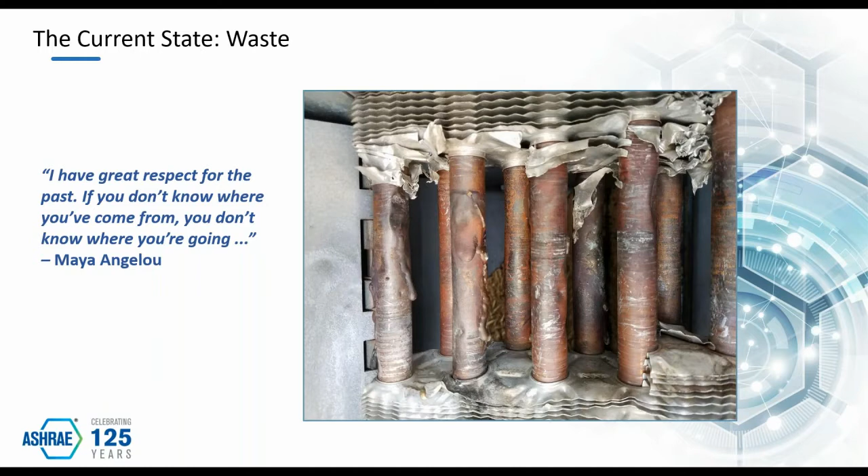Why are we still burdened in this industry with marginal yields? Well, first, our current workflows are ripe with waste. It is estimated that in the US alone, $177 billion is lost annually on non-productive labor activities: looking for information, engaging in conflict resolution, dealing with mistakes and performing rework. These all impact the bottom line. $31 billion of this loss is directly associated with poor data and communication. Poor in this context is inaccurate, inaccessible, and incompatible.

Look at this from a comparison of the manufacturing sector with the construction world. Waste is high, value is low. Waste in the solution delivery context has a direct impact on building performance. When optimization is not achieved, performance waste is embodied in the shortcomings.

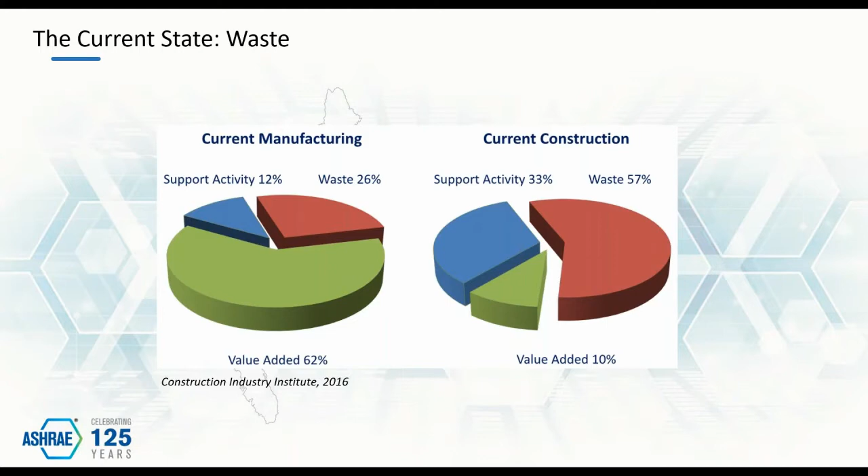Second, E&C is a flat ecosystem. Data reflects that we are not very productive. Sadly, our annual productivity growth has only increased 1% over the past 2 decades. Stagnation is costly. Look at these trends comparing construction to the total economy and manufacturing. We are relatively flat. Look at the orange line.

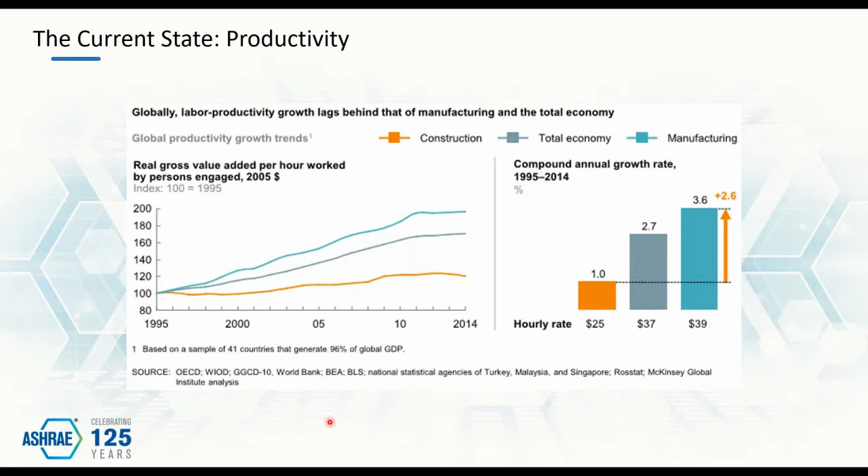What if I presented this in a global perspective? McKinsey shows us that the U.S. construction market is a declining leader. Look at this from another perspective. Stagnation also reveals a paucity of integrated high-performance solutions that are more sustainable, use less energy, and optimize holistic building environmental footprint. We are behind.

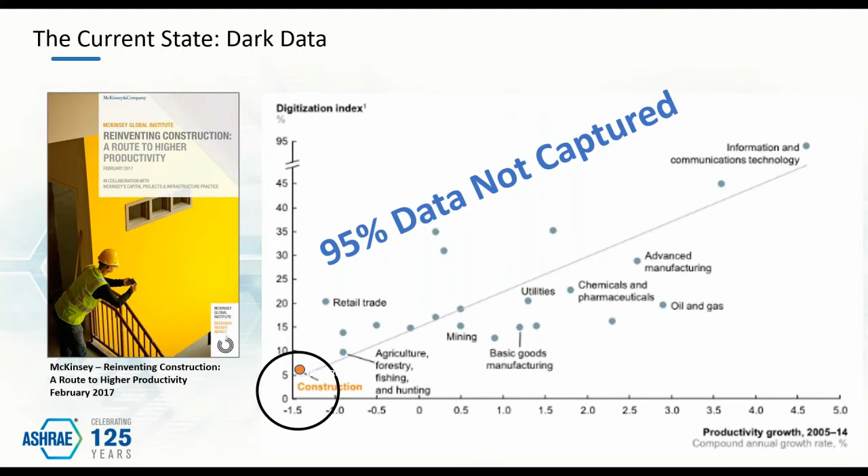Third, our ecosystem remains one of the least digitized sectors in the world. Look at us, low and left. This is not a good place to be. To compound this shortcoming, FMI suggests that up to 95% of data that is collected goes unused. We allow knowledge to go dark. Dark knowledge becomes lost knowledge. This lost knowledge is vital to building resource management.

Fourth, our logistics are poor. Our projects are late and they're over budget. Finally, it is fair to say that we remain shackled to the analog age. Over many decades, we have perfected the dance of the silos. Risk and liability keep us from optimizing the whole. We protect our borders from the impact of others.

We have so many touch points. We manually collect, review, and transfer data. We continuously recreate knowledge. We rarely consider cost and schedule as inputs to design. Rather, we delete scope when bids are over budget. We rely on paper for everything. Paper consumes time. We focus on the silos of prescriptive normative minimum. The whole is not optimized.

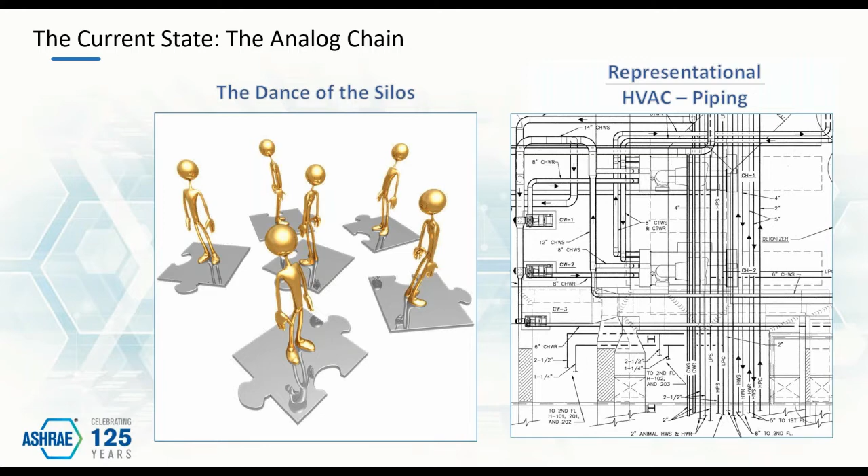We attempt to build something, looking across static drawings of, let's face it, variable quality from multiple players. Work results get executed by who arrives first in the space. This is the world we know. We excel at fragmentation and the weeds of waste. But let's look at our current state from another perspective. And we seem to lose track of this.

What do owners want their harvest to be? They want us, all of us in this industry, to do the following: resolve issues virtually before they become physical, reduce the level of unknowns and eliminate the need for RFIs, provide better cost schedule certainty, improve closeout, deliver a complete knowledge base, develop holistic, optimized solutions that minimize environmental footprint, and deliver something that works.

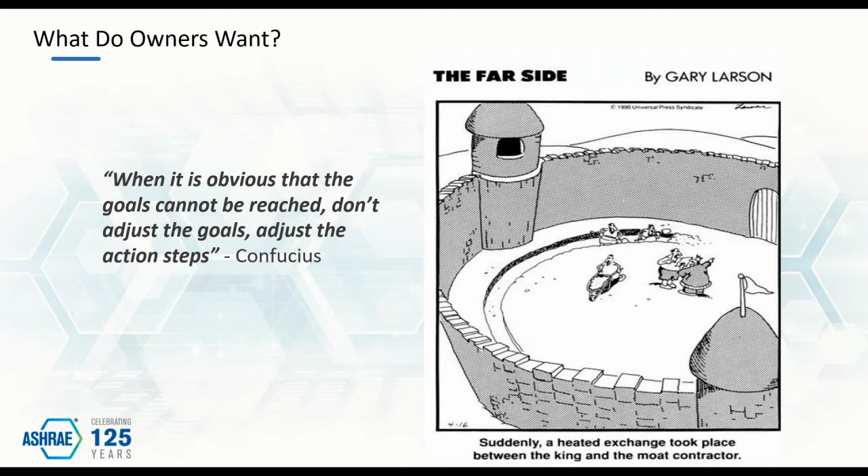I dare say these are not onerous expectations. Somehow, our industry has managed to lose track of the harvest. How do we change course and alter these conditions of satisfaction? Well, I'm going to tell you, but before we outline the path, let's reflect on our processes.

The conventional delivery process, CDP, is characterized as a linear process of sequential response by all project team members. The project builds on previous decisions, regardless of whether or not optimal foundation work is established for the next layer of development. In effect, CDP is similar to making sausage. We just cram it down the system.

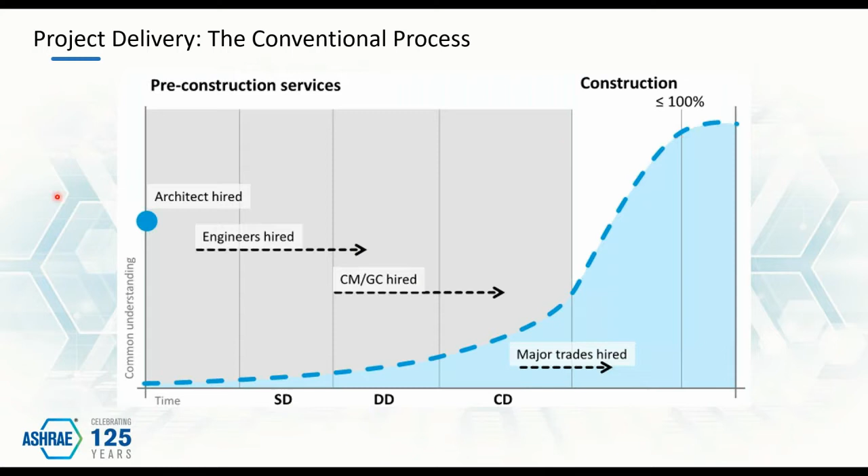Look at this sequential linearity from a common understanding perspective: the timing of when people get involved and then the understanding of what it was you were trying to do. It's a horrible system. AIA does a wonderful job of capturing this in a sequencing of what, how, who, and then realize. But look at the staggered nature of the engagement of the team players.

Conventional CDP is all about command and control, transactions, and start to finish thought. Individual risk and liability concerns foster a work environment that does not empower project participants to collaborate. Instead of optimizing interdependencies, we protect against interdependent shortcomings. The sequential nature of CDP precludes collaborative input and hampers optimized development of the project.

There's a better way. Like CDP, the integrated delivery process, or IDP, delivers a semi-linear phase progression. Instead of building on sequential response decisions, though, workflow is altered to include iterative loops. Previous decisions are challenged in an effort to find optimized solutions that fit within the project guidance. Instead of making sausage in isolation, we seek continuous improvement by making pretzels.

Look at how common understanding changes when all stakeholders are engaged in inception. We understand what it is we're trying to accomplish, and we're doing it early on.

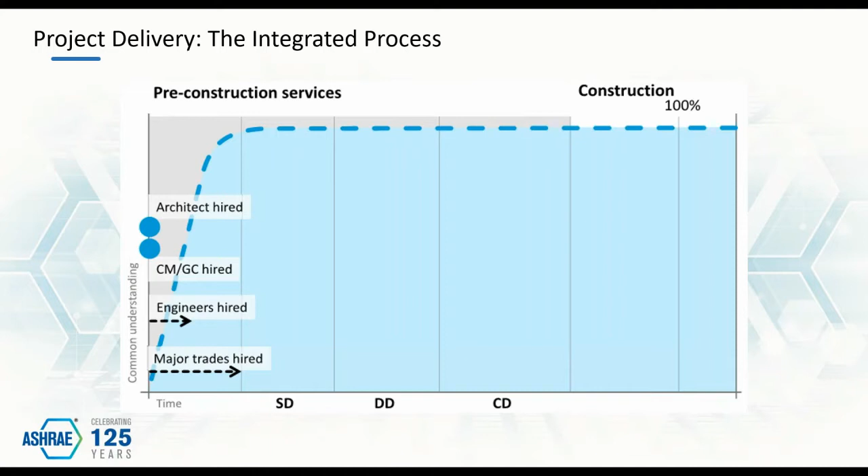AIA has another way of capturing that. Note specifically what we showed before with the what, how, who, realize progression now morphs to what, who, how, realize. This is a vital element of IPD implementation of the collaborative team concept, with more inclusive roles and altered participation timing. Command and control yields to relational.

Transactional is replaced by collaboration, and start to finish mindset evolves to lean and the pursuit of value. Collaboration fosters solution delivery of integrated systems that, in aggregate, form a holistic building. Perspective shifts from isolated stakeholder interests to one of optimized interdependencies and group accountability.

CDP can promote a less than desirable dynamic referred to as delivery in isolation. Isolation refers to the potential for work to proceed without collaborative knowledge of what the other stakeholders are doing. This phenomenon is demonstrated by our adherence to linear hierarchy role management. We see our first example of linearity in the basic tripartite relationship between the owner, contractor, and designer.

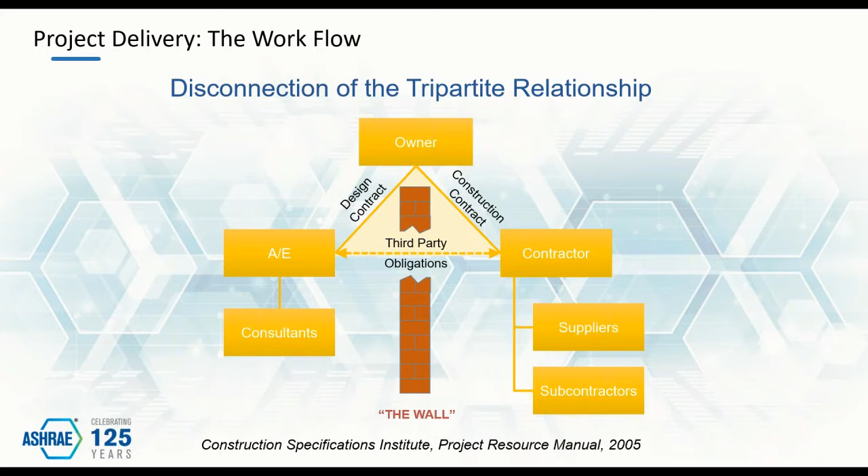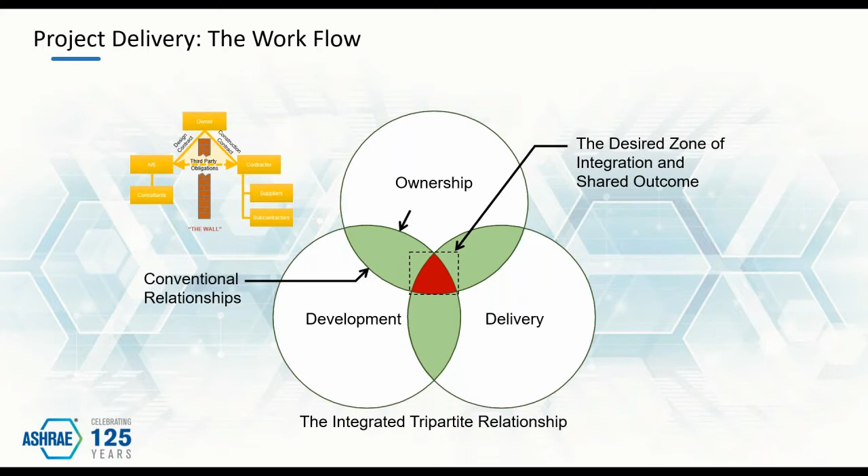A contractual disconnect exists between the design and construction paths when employing a design bid build model. In effect, we create a collaborative development wall from the outset between design and construction interests. IPD shifts the structure and mindset of the conventional tripartite relationship pyramid to one of shared outcome. Conceptually, the overlap of the tripartite interests represents the zone of integration. Silos and hierarchy yield to collaborative intelligence.

So that's foundation work. Let's really talk about the future of work. Improving our harvest begins with altering our view on the execution of work itself. For many of us, work is a place to go perform tasks. We go to work, we work on a project, finish work for the day, and we go home. Our path to fragmentation began many decades ago. Let's face it, the assembly line siloed work, and the progression through industries 2.0 and 3.0 refined work tasks. Over time, we have systematically built our own silos.

What is the work that really needs to be done? What if work itself was redefined? What if we shifted from task to higher value activities? Prepare yourself. A new vision of human engagement awaits. Work, workforce, and workplace. Imagine a world where we break down work silos and become one integrated force. Collaboration will engage all stakeholders at inception to find value. Digital intelligence will amplify human intelligence.

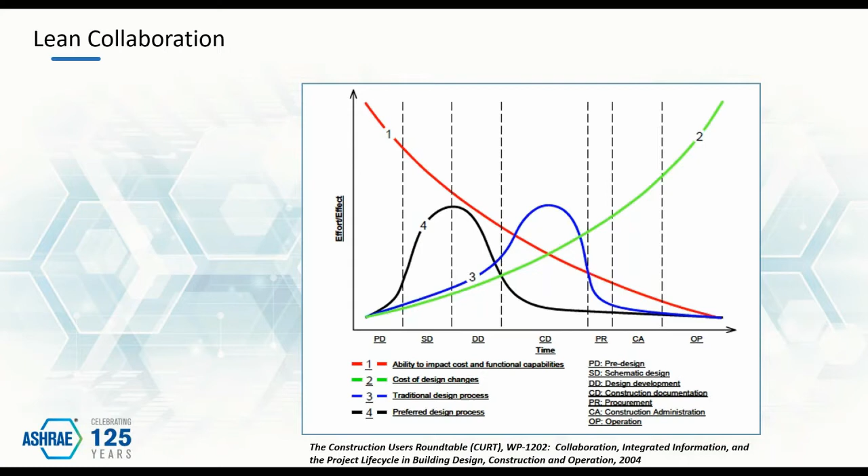Step 1, and you may recognize the famous MacLeamy curves. Step 1 of our transformation requires proper preparation via lean collaboration. Preparation must always keep value discovery in focus. Beneficial impact is best realized when captured early. Effort that occurs later in development has minimal opportunity to impact value, and changes become very expensive.

Lean processes create better customer experiences. Our ecosystem needs to adopt a lesson from manufacturing. That which does not add value is waste. It's pure waste. But how do we uncover value? 6 principles of lean illuminate our path. Respect for people is the core fundamental.

We must evolve to value stakeholders and their knowledge, solve the issues and stop blaming the participants, and honor our commitments to the team. We must look beyond the borders to optimize the whole. We really have to define what customer value means. What do they want? How do they want it? And what are they willing to pay to get it?

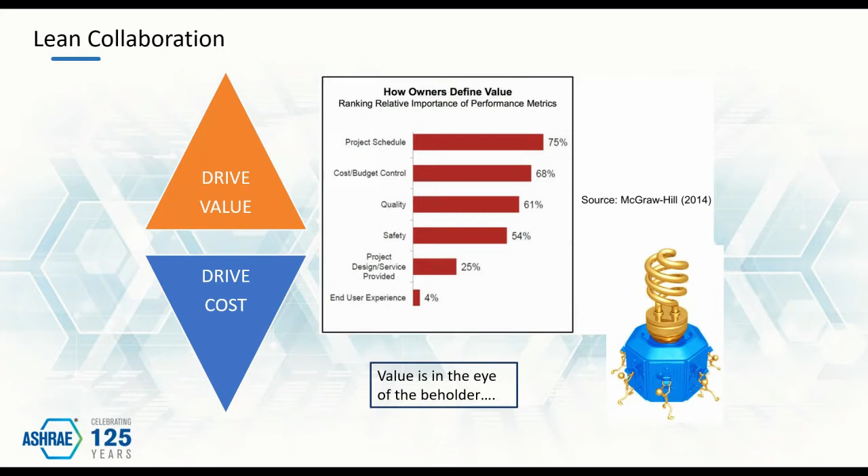We must map the value stream to identify and remove waste: wasteful practices, wasteful solutions, wasteful operations. We must map the value stream. Execution of Lean IPD requires new perspective for all of us. Consider, there's only one narrative. Risk and reward are shared, and decisions are value-based. In all phases, nothing is done until it should be done. And yes, design is no exception to this rule.

I will never forget my first visit to what we call the big room. And yes, that's me with a little big belly right there.

My comfort zone was attacked. I'm an engineer. I like order. I like things in order. My comfort zone was attacked. My understanding of order was threatened. I was in a new world. Project success wasn't prescripted. Humans reached across borders to define what the harvest should be.

We became the operative word. How are we going to deliver this as a team? Flow was no longer associated with fluid transport. How could this be? I'm an engineer. There's got to be a pump, some water's got to move. Flow had a far more important role to play. And just for good measure, flow didn't start at the headwaters and move outbound. Oh no, not that simple.

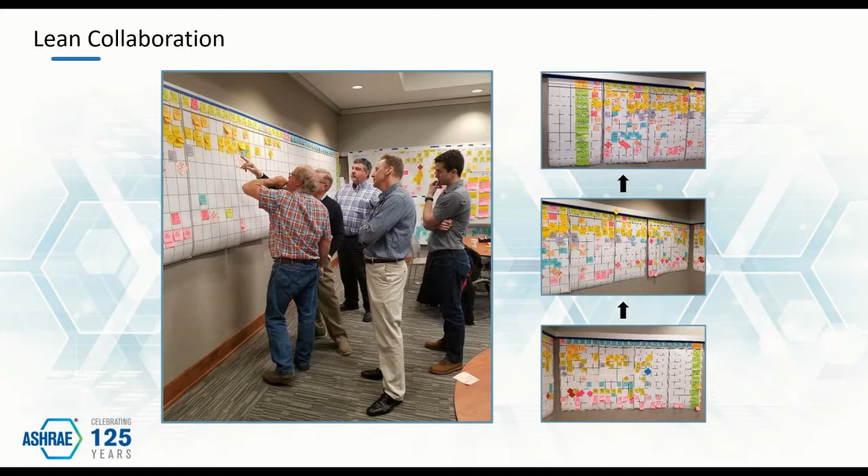Flow started at the vision of a built solution and backed up to understand the path that needed to be traveled, a path that revealed how the project would be delivered, what the order of events needed to be, and who owned the commitments along that path. And finally, we must demonstrate continuous improvement along this path. That is lean collaboration.

So proper preparation will reveal all aspects of planting the correct crop. How we maintain that crop defines how bountiful our harvest will be. Step 2 requires embracing digital technology. Transformation, though, is not simply associated with adopting new technology, buying the latest software. Knowledge needs to be captured and linked. It's all about knowledge. So let's explore critical aspects of managing this process and what opportunities the digital landscape affords us.

Digital technology is creating vast amounts of data. We are literally swimming in data. We must figure out a way to connect all of this knowledge. The evolution of the common data environment, CDE, is warranted to manage information. A single source, single truth, lighthouse. The CDE platform sets the table for all portable project knowledge. Connected knowledge affords interconnection, which paves the way for grid interactive buildings and resilient communities.

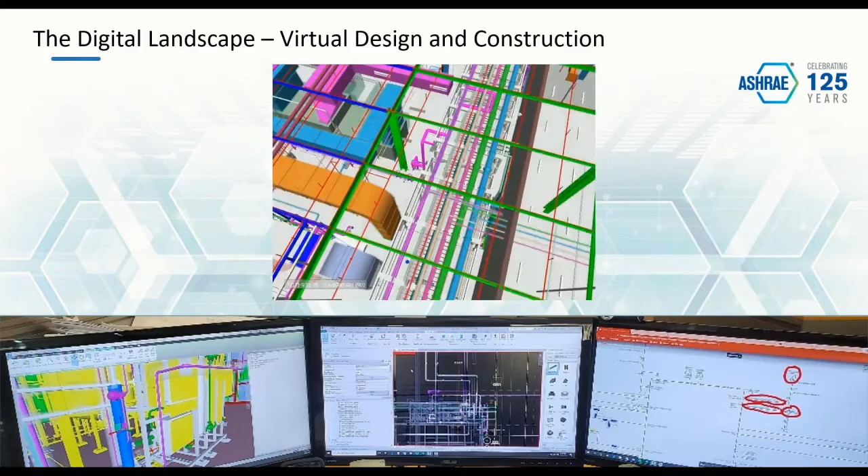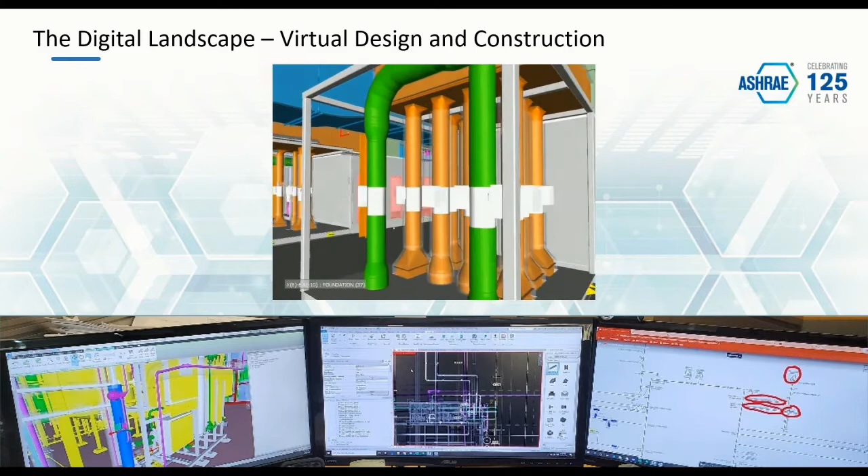Virtual design and construction, or VDC for short, is a process that moves us from static drawings to 7D BIM models. We are making the transition from static geometry to dynamic information. Remember when we shifted from paper to CAD? Well, the shift from CAD to digital models is going to be just as disruptive. But intelligent objects contain knowledge. Changing an object anywhere becomes an integrated change everywhere.

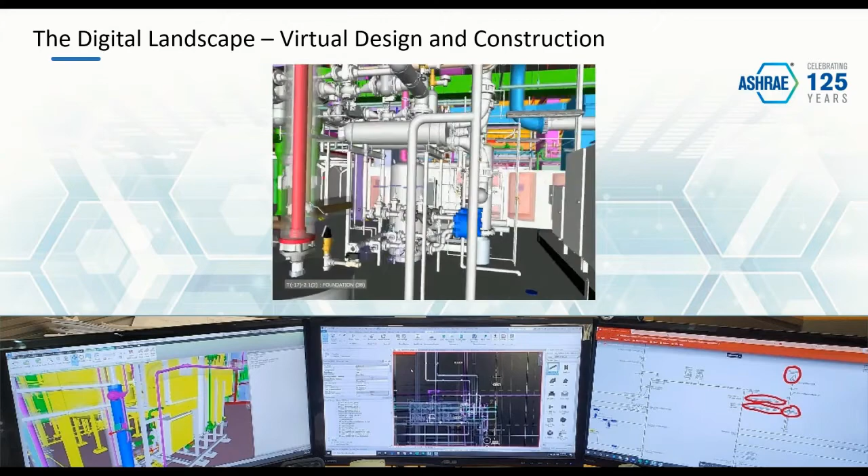Our use of a 7D platform will verify constructability, reveal time, capture economy, integrate performance modeling, and connect operations and maintenance. Printed documents, this is a very important point. Printed documents will no longer be the primary representation of our projects. The model becomes the database of all project knowledge.

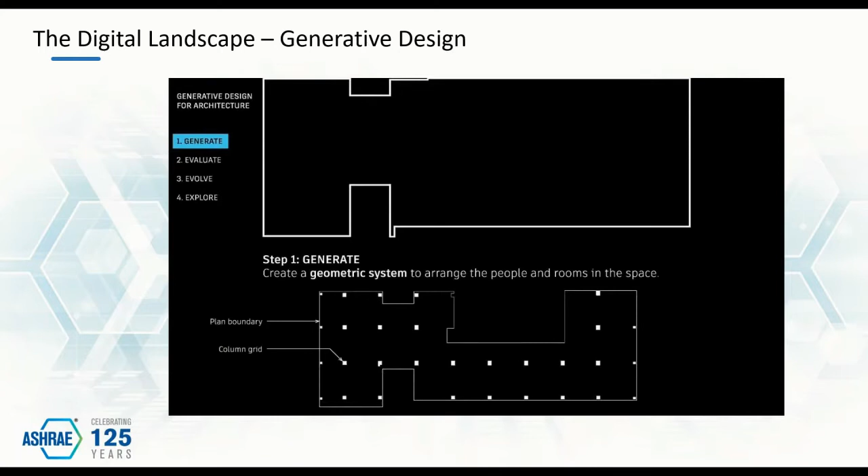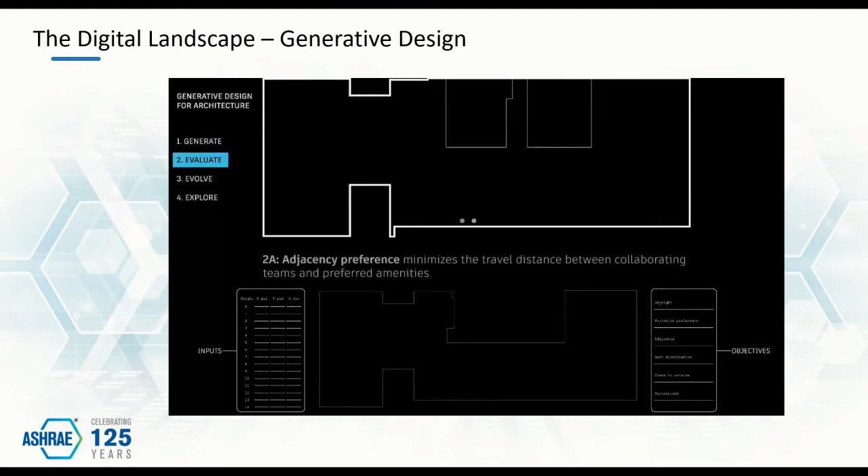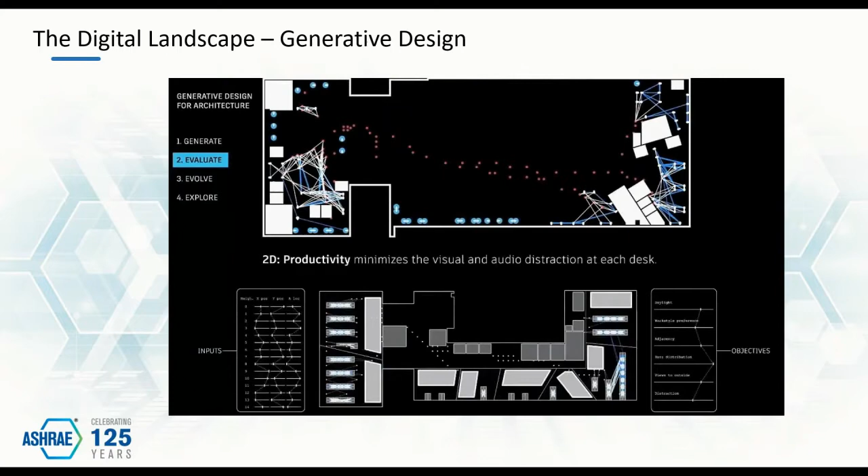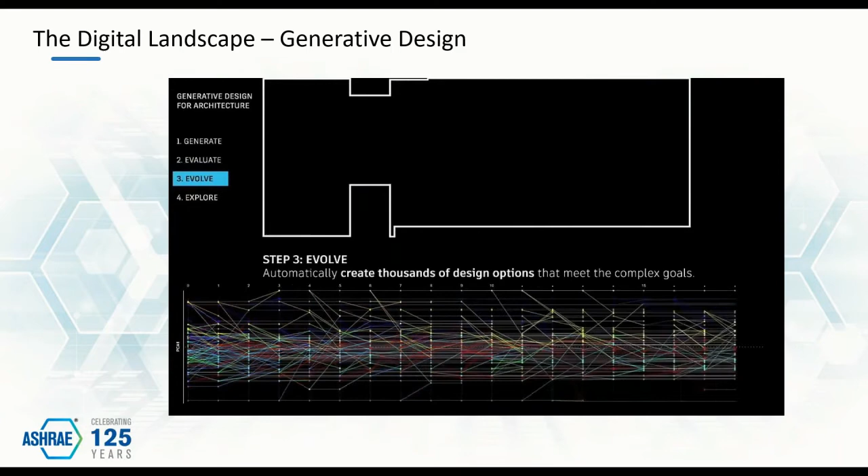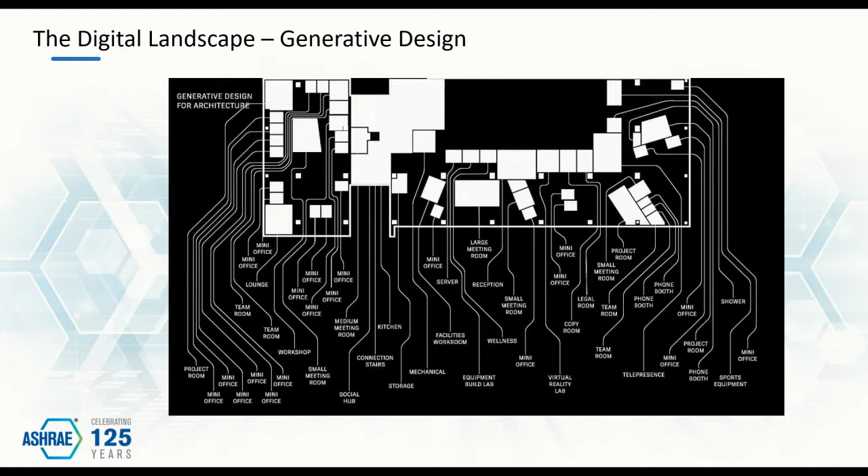I still remember the countless hours that performance modeling used to require. Yes, drawings had to be measured by hand to capture geometry. Elements had to be found on details or buried in the spec book. Systems had to be manually configured in singular fashion. One change, just one change, required a complete redo of the entire simulation. Those days are behind us now. Objective-based integrated building design is at our fingertips.

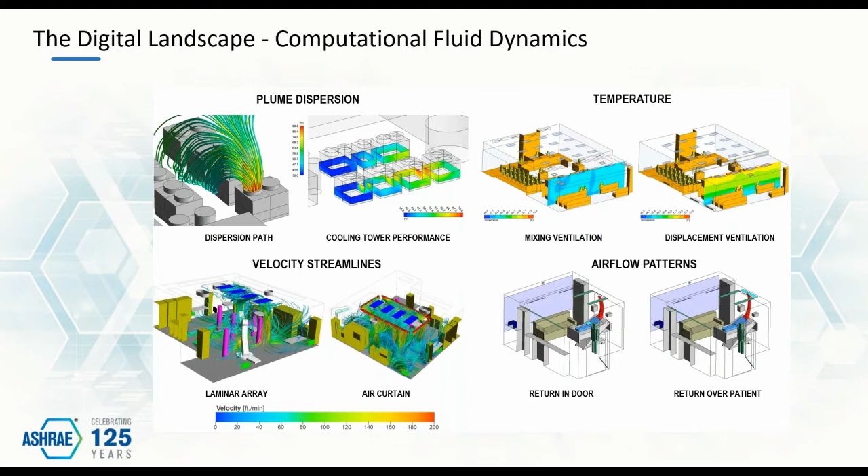Airflow patterns are vital. Simple throw patterns and arrows on 2D drawings do not reveal truth. What doors would open to us if we had insight into how air should act? Tools such as computational fluid dynamics, CFD, allow us to visualize thermal impact, understand the path of air, compare ventilation strategies, simulate thermal comfort, and demonstrate ventilation effectiveness.

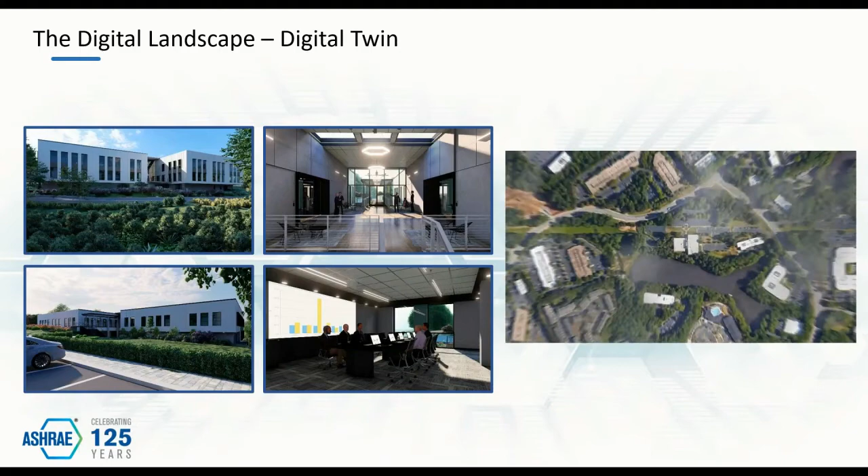By connecting sensors to a digital platform, we can create a virtual mirror of our physical asset. This digital twin allows us to embark on a continuous journey. We collect real-time performance data, provide an evolving profile of past and current behavior, employ analytics to mine the data lake, searching for trends and patterns and all that metadata, and then identify actionable intelligence. And we just keep repeating the cycle.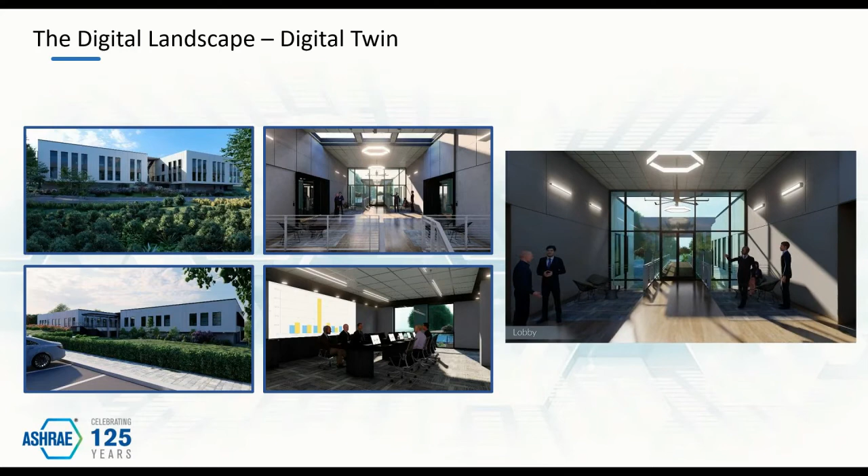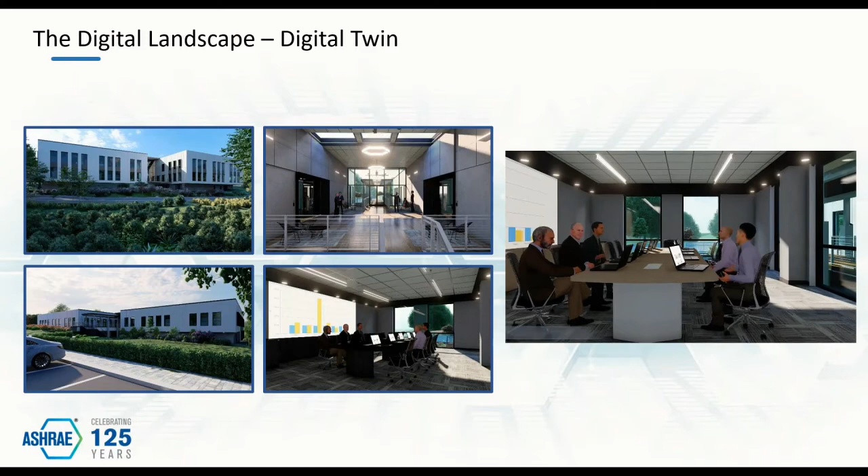Now consider what the power of this insight yields. For commissioning, we have a connected tool for tuning performance 24/7. For building performance itself, we have a robust engine that monitors and optimizes real-time facility resource impact. For operations, we transition from reactive to predictive response. For R&D, we have real-world information that supports validation of our performative simulations.

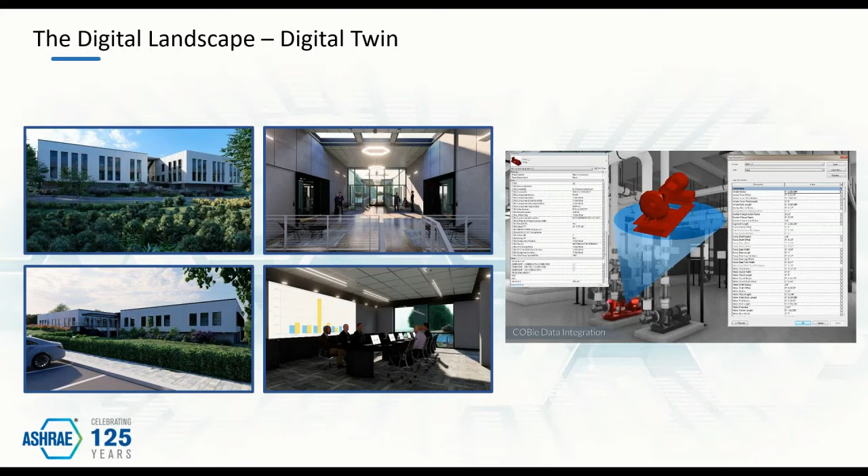And you've been watching the genesis of our ASHRAE digital twin unfold in this segment.

Drones provide invaluable support logistics. Construction aerial mapping can capture all site and infrastructure content. Construction monitoring is available at any elevation. We are no longer tethered to ladders, lifts, and safety harnesses to view the project.

Thermal mapping can be performed around an entire building envelope. This technology was used to evaluate the as-built integrity of ASHRAE's new renovation headquarters. Thermography provided the insight needed to modify the existing envelope of a 1970s era building for high performance.

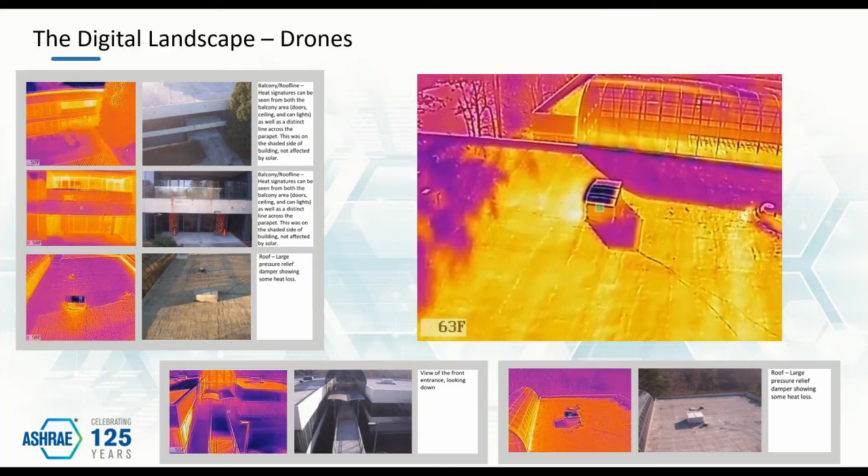Think of all the energy that can be saved via revitalization of existing building assets at scale. We can identify thermal weakness. We can correct root cause waste.

Scanning via light detection and ranging, or LiDAR, delivers precise point cloud maps of surfaces and complex geometries. We can scan densely packed settings to capture true as-built conditions. We no longer need to search for paper and attempt to recreate what was built.

Manual measurements, pulling the tape measures, is eliminated. Waste is removed. Scan point clouds can be integrated to our digital models.

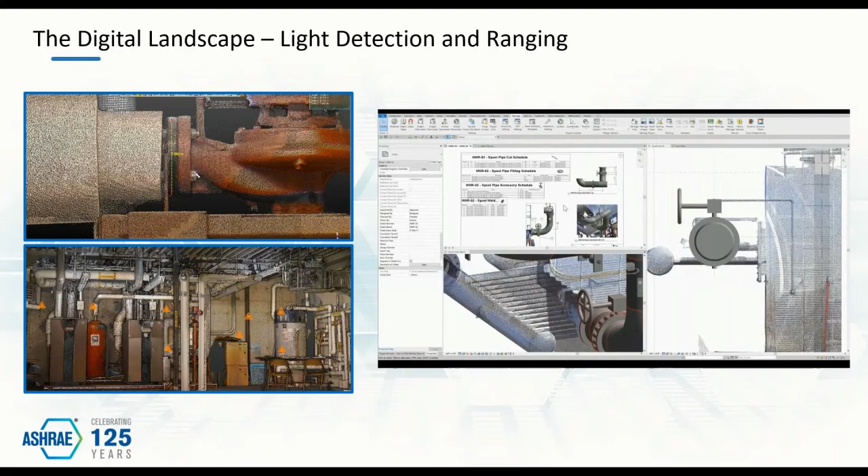Technology captures the truth. Augmented reality, AR, or any of the mixed or virtual reality, can take model data and project a precision reference in the physical world. Peruse some possibilities as you immerse yourself into the new ASHRAE mechanical room here.

Imagine using a simple cell phone and a positioning device to locate exactly where penetrations and attachments should be installed. Project a virtual installation onto the target zone for work results to commence. Reveal where hidden infrastructure is actually located, as long as it was installed per the model.

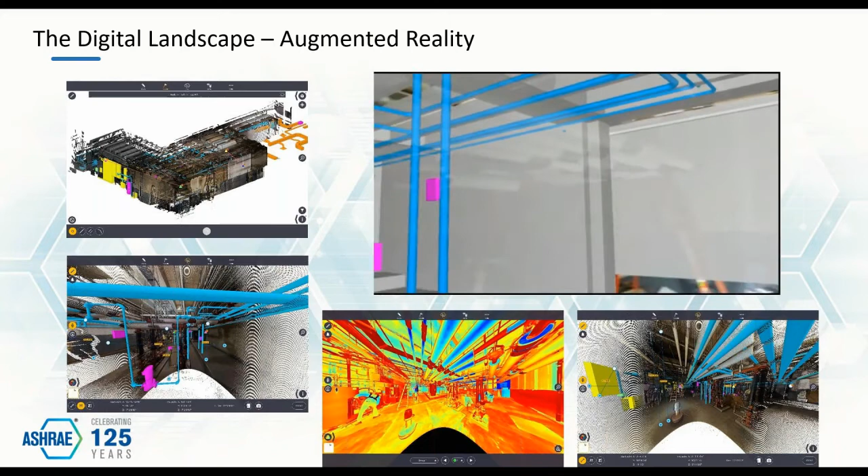Wearables allow us to project complete MEP layouts. Virtual insight allows us to see where work results should be performed. And by the way, for the work that has been installed, it can be verified with the 7D platform.

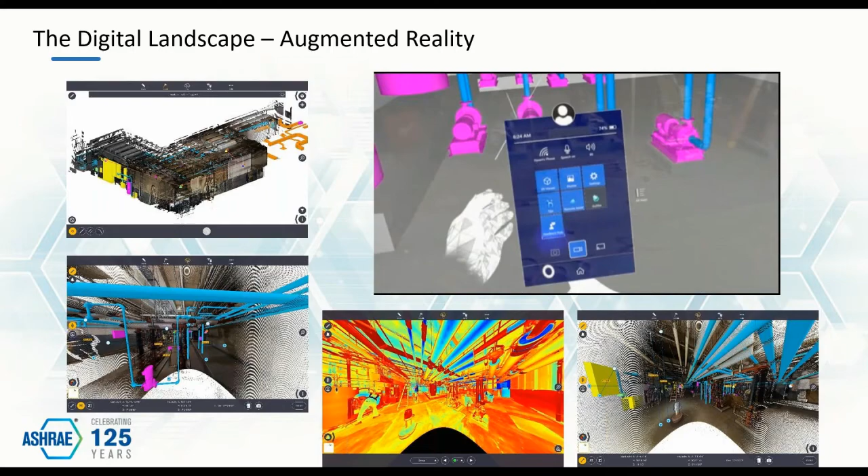Our third and final step moves our journey off-site. Design for manufacture and assembly, or DFMA strategies, challenge where physical work is performed. I teased you with this. But what are the benefits of decoupling work in this manner?

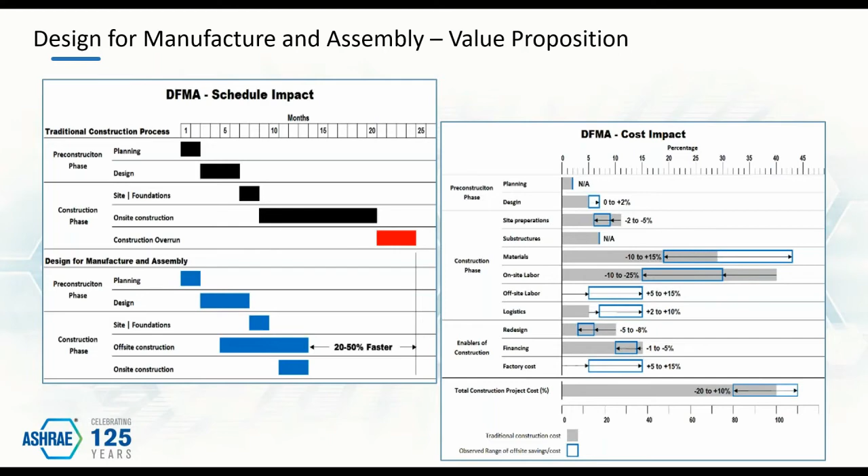Well, parallel work leads to shorter schedules and reduced overhead. That's a savings for people. Vertically integrated supply chains drive costs down. That's a savings for people. Automation reduces human and material waste. That's a savings for people. Precision enhances quality control and reduces rework. You get the theme. Applied correctly, this equates to enhanced economy, time, and quality.

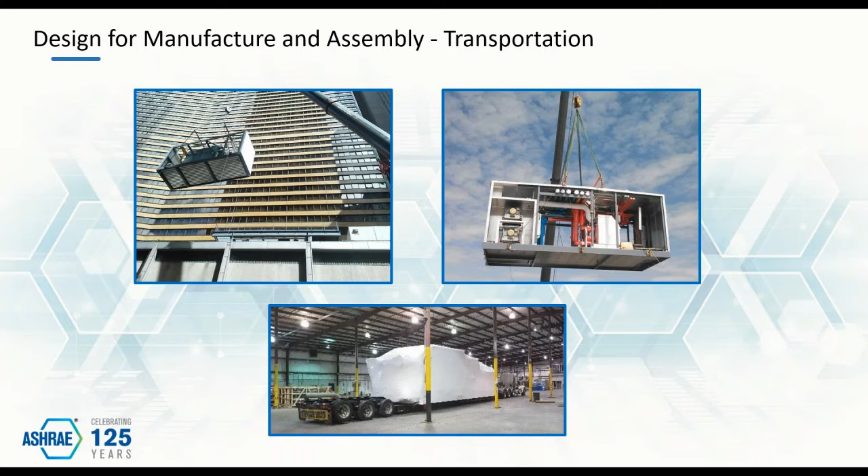But modular requires us—I like saying modular, DFMA is hard to roll off the tongue—modular requires us to think differently about system design. Transport logistics will influence layout and configuration.

Repeatability and standardization enable production efficiency. On-site logistics, of course, determine interface, but we are only limited by what can be shipped or moved. Modular is a scalable expression that can be executed at many levels.

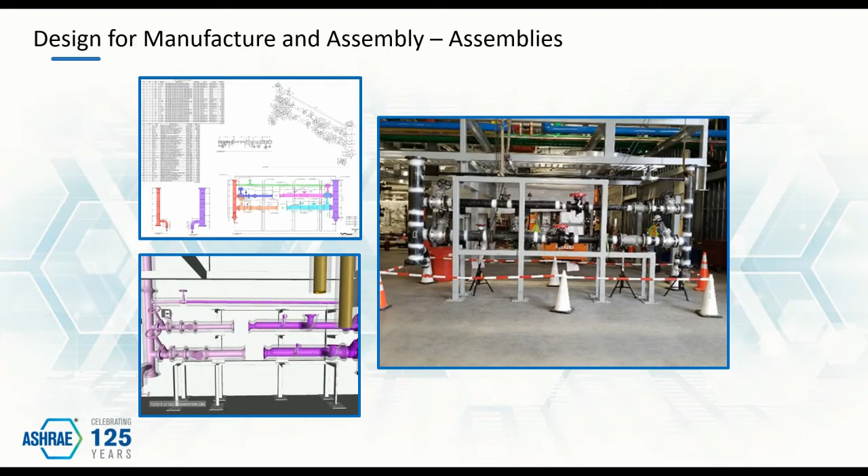In its simplest form, we can prefabricate basic assemblies to support on-site or off-site just-in-time flow. Facility services, your Division 20 aspects of MasterFormat, can be designed and built on racks to reduce on-site overhead clutter and laydown area.

Look at this. We've got electrical conduit, we got plumbing pipe, we got ductwork, we got cable tray. All of this is configured in the shop, on the floor, in conditioned safe space, and brought out to the field and put in modules through the floor plate. Look at the savings that's delivered when we do things this way.

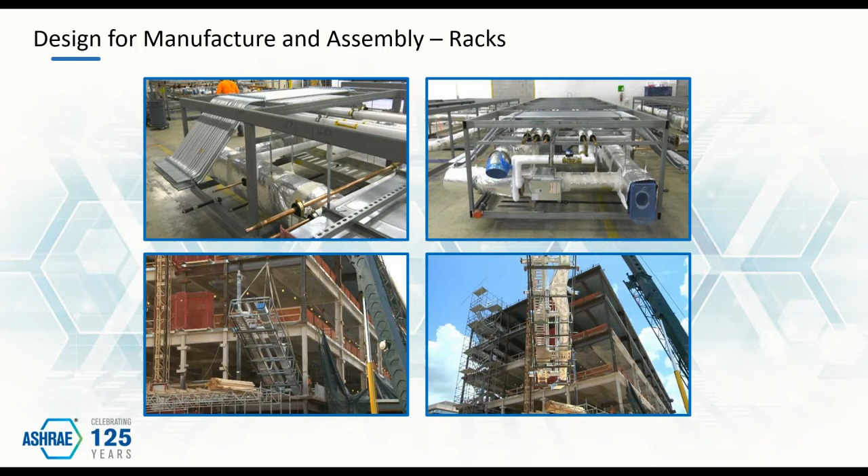But let's increase scale to the equipment level. Unitized skids can be built, tested, commissioned, and validated, offering complete MEP setup before they ever get on the job site. Wiring integrity can be verified.

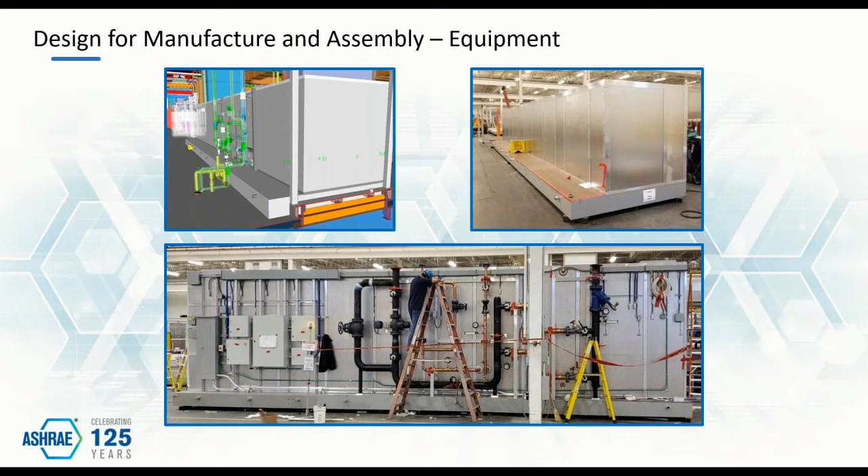Sequences of operation can be simulated. Functional attributes can be checked off. Look at all the work that can be done outside the unfinished building.

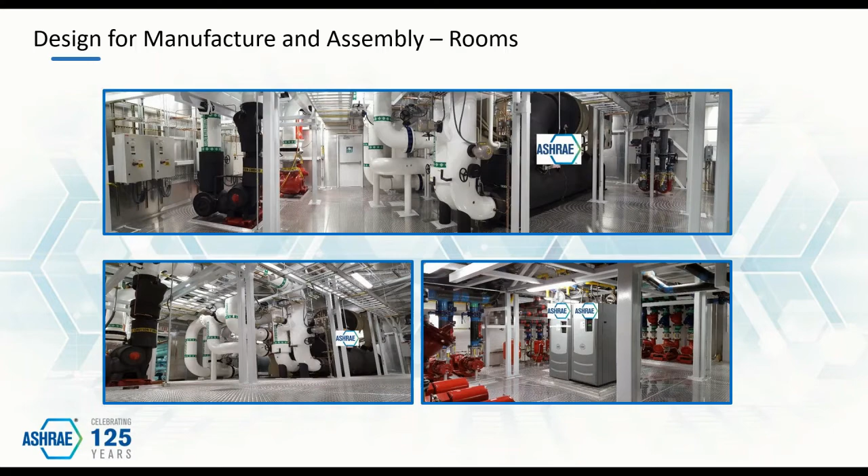But there's more. Super skids, rooms, and floors can all be imagineered. Picture a world where central plants are delivered to the job site. It's here, it's now. But the true definition of at scale can be understood when we realize complete buildings can be modular. Pause and reflect on that a minute.

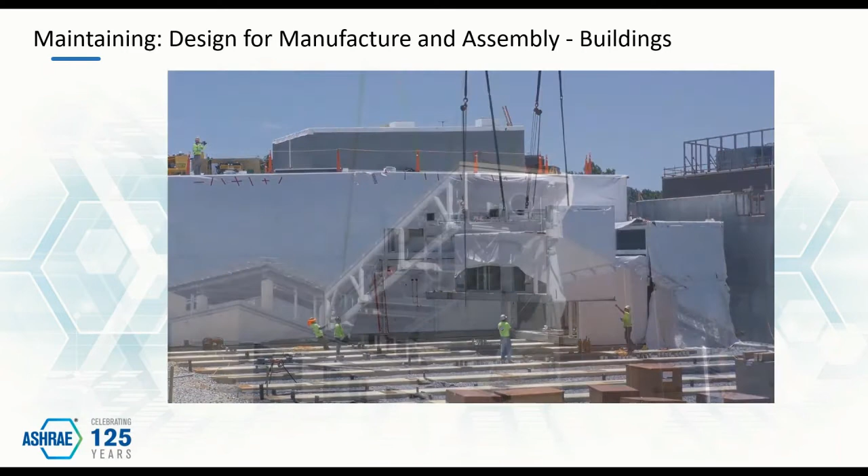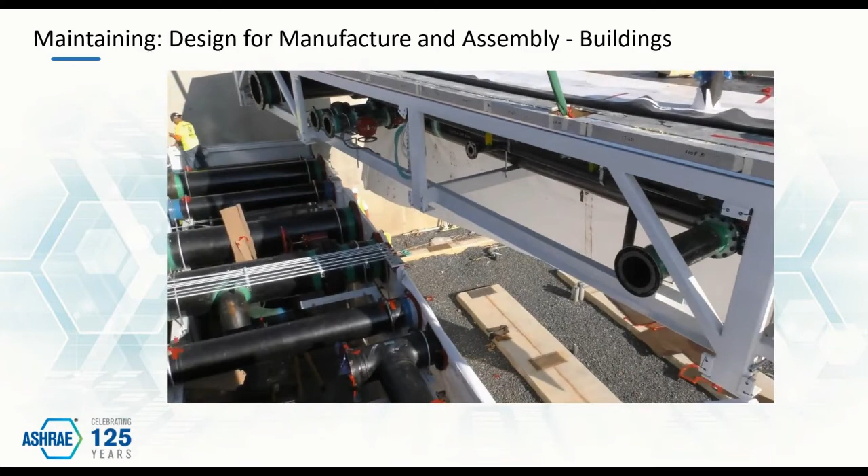Because of virtual precision in the digital world, we can now design a virtually precise building, build it completely off-site, prepare the site to receive the modular solution, and then ship the modules to the project site staged for just-in-time flow. Then assemble the modules like Lego blocks in sequence to form a complete structure.

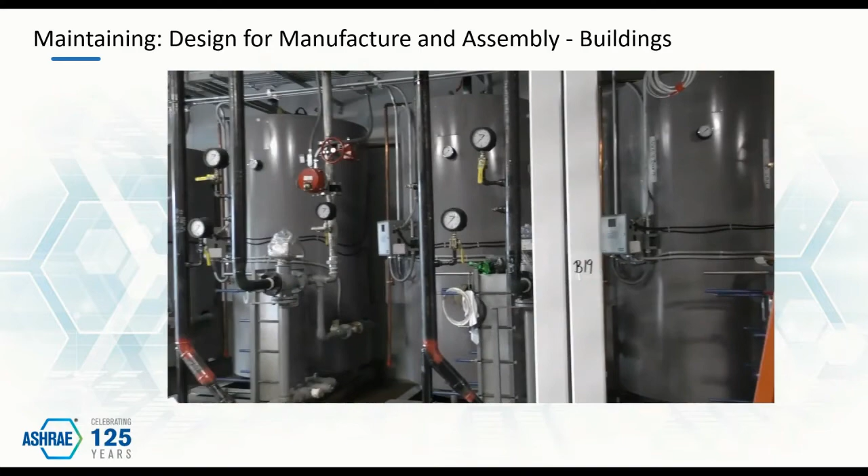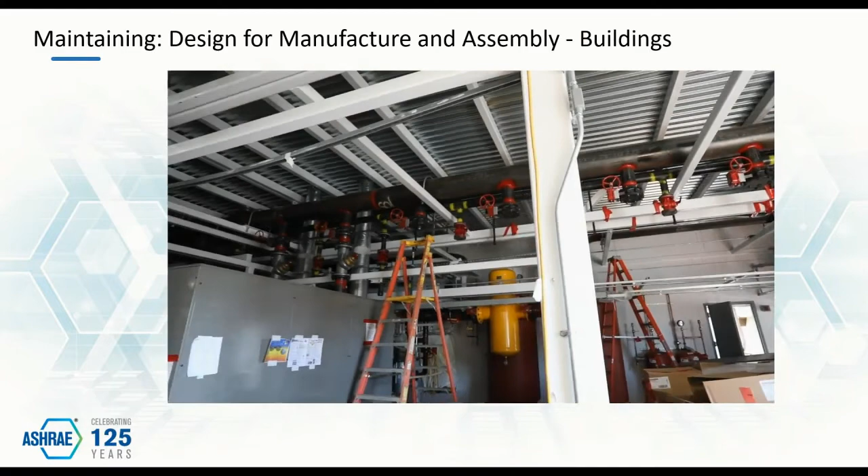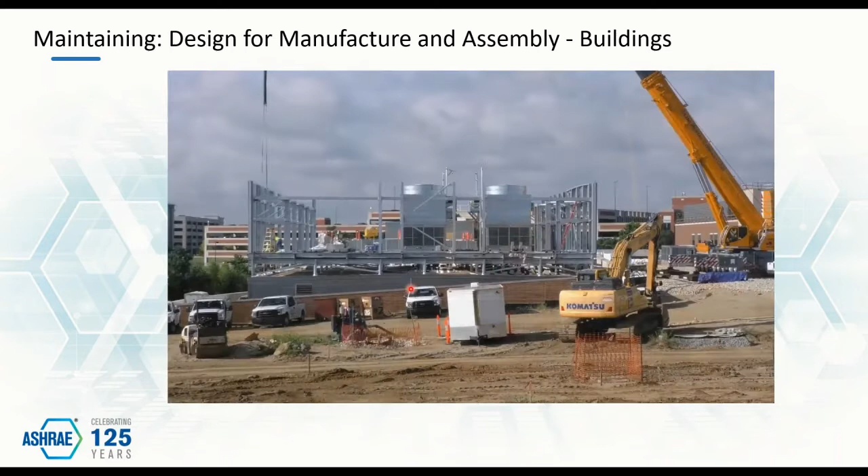Let your takeaway on this whole DFMA or modular narrative flow something like this, intentional use of the word flow. Work results no longer need to adhere to start to finish thought. We have evolved. We have decoupled the sequential supply chain. We can build an entire building off-site.

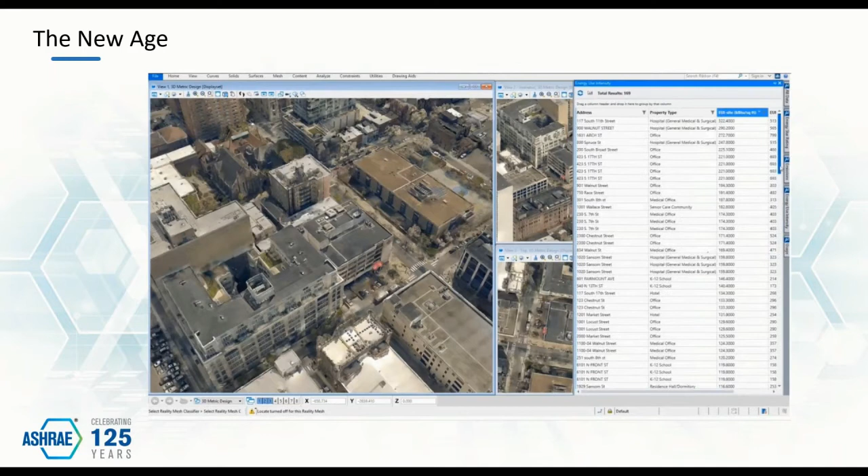Welcome to the future. A new age awaits us.

Collaboration, value, digital, and off-site are changing our ecosystem. Collaboration breaks us from fragmentation. We have an opportunity to challenge what work is, how it should be approached, and where it can be performed. We can engage our workforce in activities that seek and create value.

Data becomes a critical resource. Everything that unfolds in the future revolves around data. Now, I know some of you have probably already started to travel this path, but many have not.

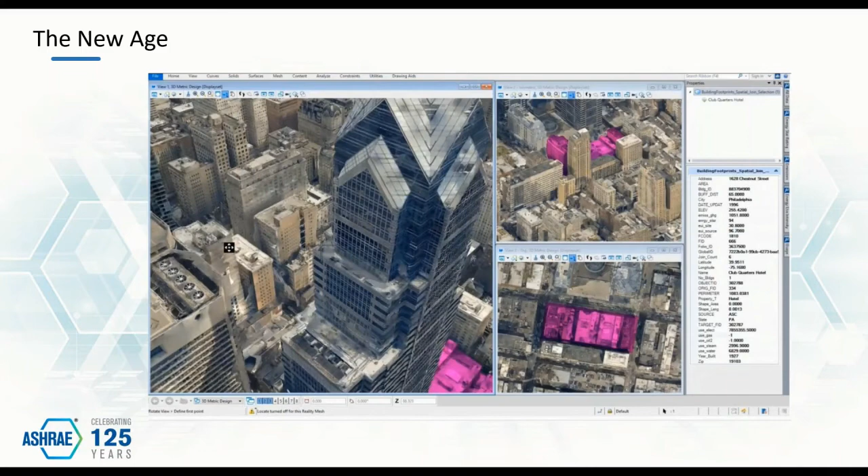So, innovators and novices, here's a critical point to remember. Our harvest is realized when we implement technology to improve our productivity. Humans are the key. It is up to us to determine how we benefit from a connected digital world.

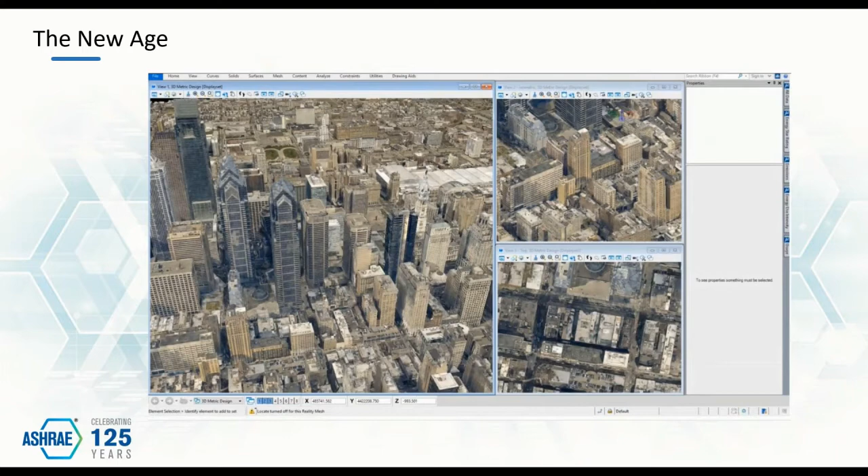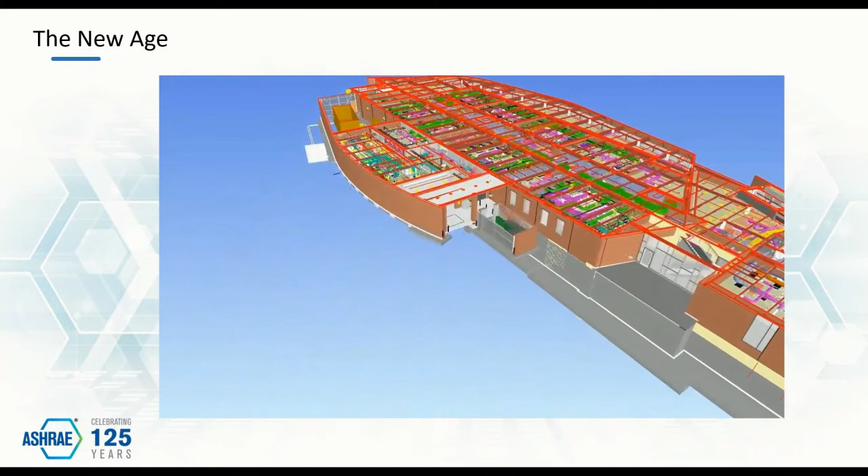And I can't go through a presentation without making a nod to the years 2020 through 2021. We will remember them in infamy as the period of the global pandemic, and we are witnesses to indescribable tragedies.

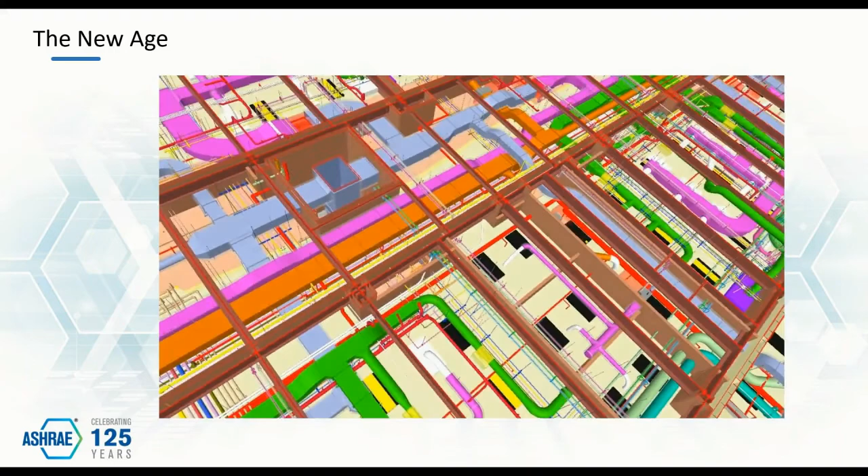As for our industry, supply chains have been broken, projects have ground to a halt, worker productivity has been compromised, co-location events have ceased. But if we can look past the tragic aspects of this point in time, opportunity can be found. The very tools and procedures needed to improve our harvest are being thrust upon us.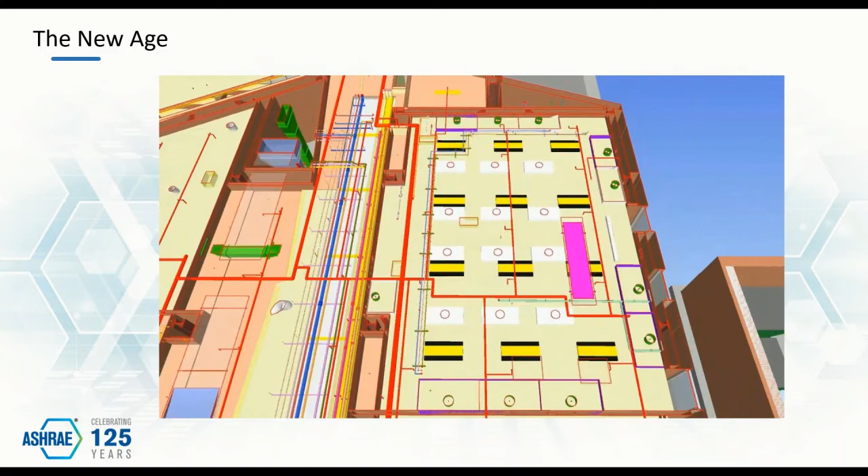We are engaging in digital collaboration to survive, but reactive measures do not resolve the ultimate question. What can I do to deliver a bountiful harvest?

So here's what you should do, or better yet, should be doing now. Implement a corporate digital core. Work, workforce, and workplace must be connected.

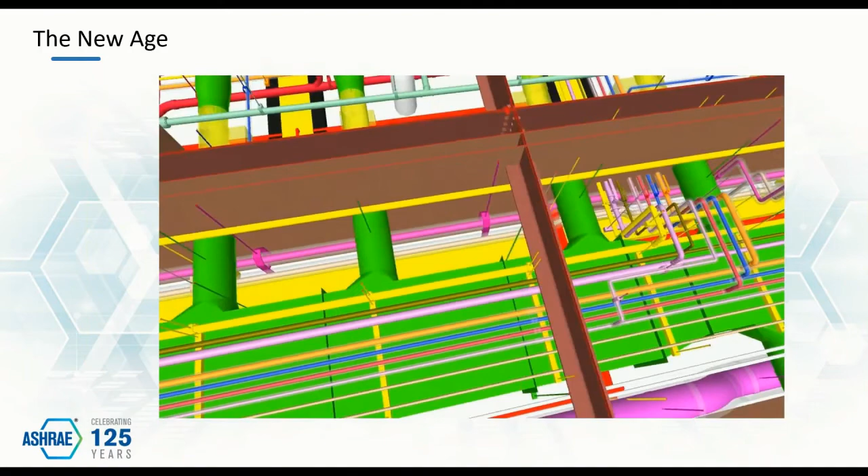It's all about connection. Commit to a digital culture that expands appetite for risk, encourages experimentation, and invest in digital talent. And oh, by the way, expands collaboration skills.

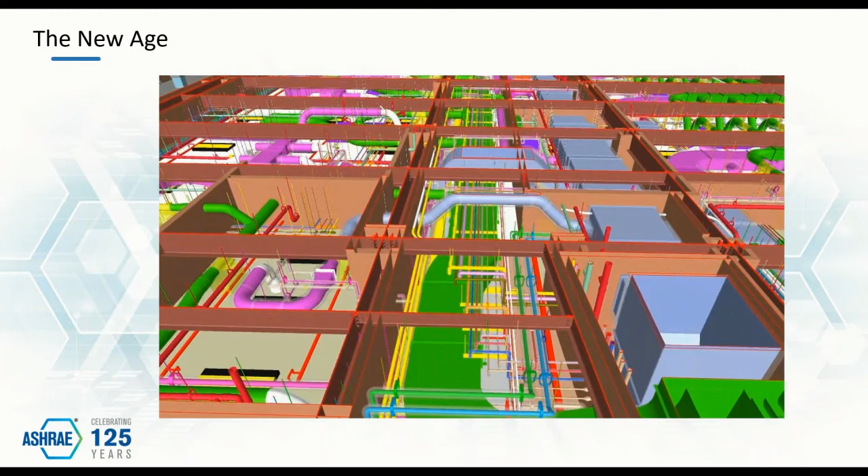Adopt lean collaboration as a core philosophy. And finally, but not least important, connect all the stakeholders and the supply chain to expand your understanding of what is possible. Industry 4.0 and the digital age of connection are here.

Our world and industry are changing dramatically by force and maturation. Buildings of the future, whether new or old, will become data-driven. The entire design, build, operate journey will evolve from silos and static points in time to dynamic real-time asset management.

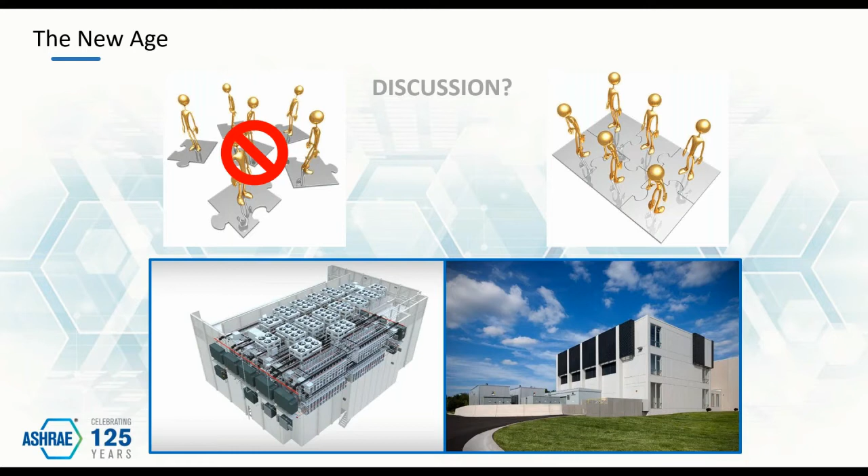Are we ready? So join me. I think we can be. So join me in preparing, planting, maintaining, and delivering society's bountiful harvest. Thank you.

We do have some questions come in. As you were speaking, I was actually making a note, and then you went ahead and actually addressed it right there at the end. I was thinking about the last couple of years, and was going to ask to hear some of your insights on what you've learned the last couple of years, and you went ahead and touched on 2020 and 2021. But if you had any more to add, just kind of off the cuff, basically, I guess one question is, do you think that some of the issues that you've highlighted in suggestion, remote inspection and drones, virtual, et cetera, the need and demand for that has been accelerated in the last year and a half or so?

You know, I will bring it back to a force and maturation scenario. We have relied on the digital technologies to keep us employed to design and build solutions out there. So I take my ASHRAE hat off. I'm a design build contractor, so I live in both the engineering and the construction world in one space, and we have had to rely on digital technologies to keep people working remotely at safe distance, because we've had to spread our workforce out.